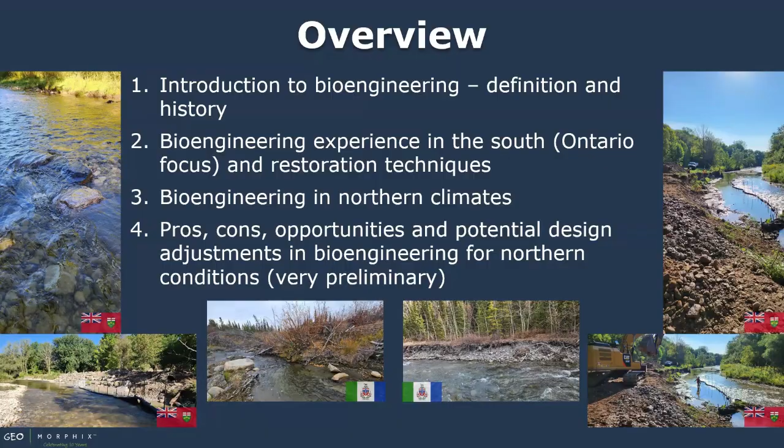Bioengineering is a tried and true method. What I mean by that is the use of vegetation and inert materials like rock and wood have been used for a long time for stabilizing. Bioengineering is actually a very effective method of erosion control.

In a lot of cases, riprap or large rock is used. It's placed on the banks, and we hydraulically size it and put a factor of safety on that. What we're hoping with that is that that rock will not be lifted, scoured by ice, taken by hydraulic characteristics, but the entire strength of the riprap comes from the mass of the rock.

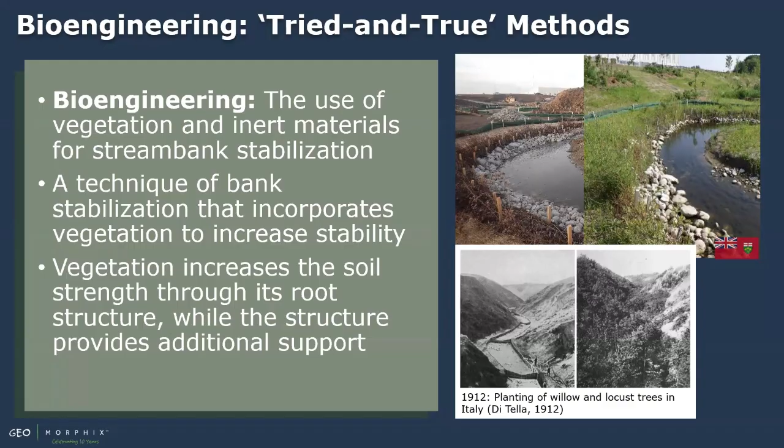Once you introduce vegetation in, growing material, it can bind, producing almost what you would find like a metal gabion basket, but it's a living structure that binds into the banks and actually provides more strength in the long run than the stone or the wood would provide by itself. It's also about soil development and that creation of soil and that binding mechanism to create more of a structure versus an individual particle.

So it's been around a long time. First records of it are 2000 BC in China. In 100 BC, there are records of fascines or wattles being used in Europe. 28 BC, there were willow bundles drawn onto tapestries, which I guess was the first detail.

That's a good engineering joke.

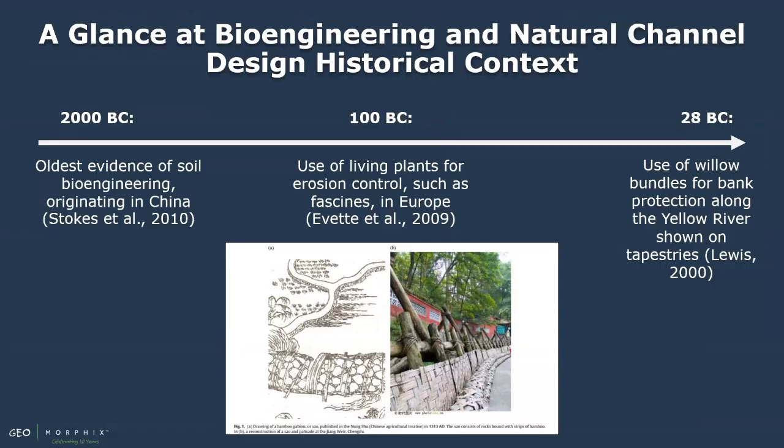Anyways, when we move into the 1600s and we look at a more Eurocentric view, there's an increased prevalence of the use of vegetation for erosion control, for riverbanks, for basically channelization, bank stabilization, and a lot of gully control. The drawing that you're seeing at the bottom is from the 1730s. It's one of the first guidance documents on applying bioengineering, and in this case, wattle treatments in Europe for erosion control. It is not the new kid on the block.

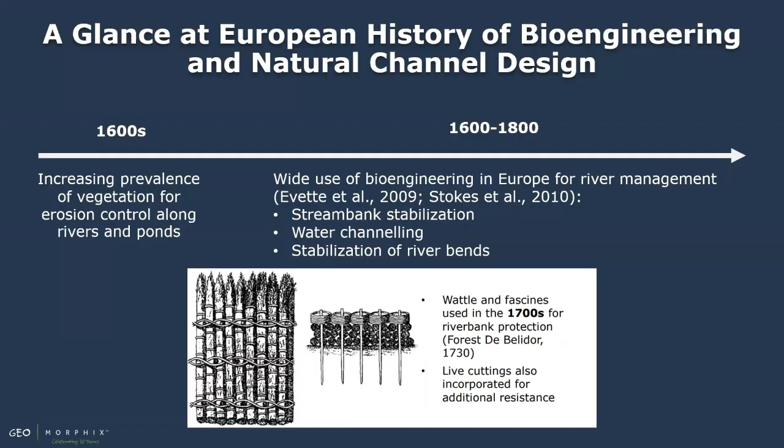Anyways, now we look at the more recent history. So why do people think that bioengineering is a new concept? And the reason is that after the 1940s, we had access to a lot of labor, fossil fuels, and concrete. And in a lot of urban centers, cement and engineered solutions were applied to basically address erosion concerns and to get the water off the landscape quickly.

It was very effective for moving water. It did have other unanticipated impacts, erosion downstream, impacts to aquatic ecology. There are a number of things that we lost in that trade-off of being able to move the water off the landscape quickly. Come to the 90s, we start seeing in a lot of urban centers across Canada, particularly in the Ontario context, that we needed a new approach if we wanted to maintain the ecology and provide other functions other than moving water off the landscape. So we have this resurgence of bioengineering in the 1990s.

I was lucky. My career in consulting started in the late 90s, which means I was able to be involved with this process of trying to build new concepts and bring them into our way of managing rivers. 1990s, the emergence of natural channel design, the idea of taking geomorphological forms that we find on the landscape and replicating them in the design.

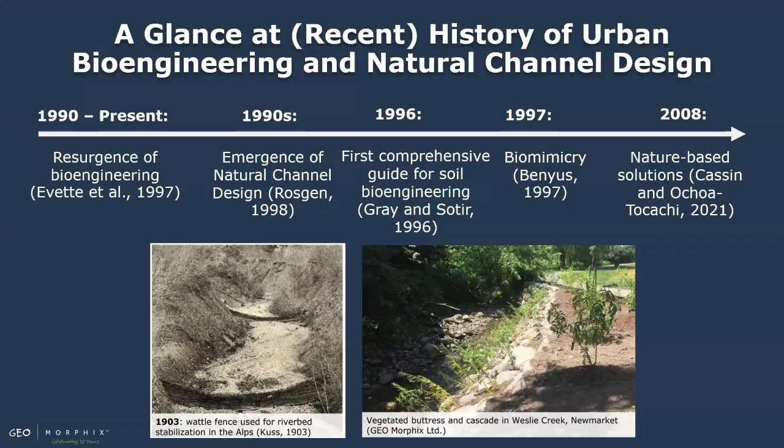What I'd love to see, and I've been able to watch this process occur in Ontario and other jurisdictions, is bioengineering does not remain a unique tool that's only used for habitat restoration, but it becomes a larger portion of the toolbox that engineers, biologists, geomorphologists use to deal with river management. And recognizing that it can be used as part of that overall toolbox for both doing erosion protection and also for providing the ecological benefits.

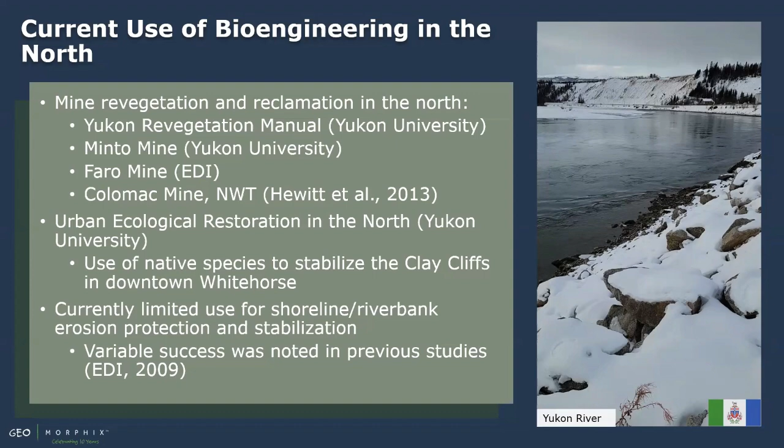Why bioengineering in the Yukon? First, it can be used for a whole bunch of different situations. Shoreline protection, riverbank stabilization, so real true erosion protection, stream diversions at mine sites, tailing pond stabilization, support for bioremediation at contaminated sites. There should be an asterisk there. There's a lot of management and other things that have to go on with regards to that. It's not simply about planting vegetation.

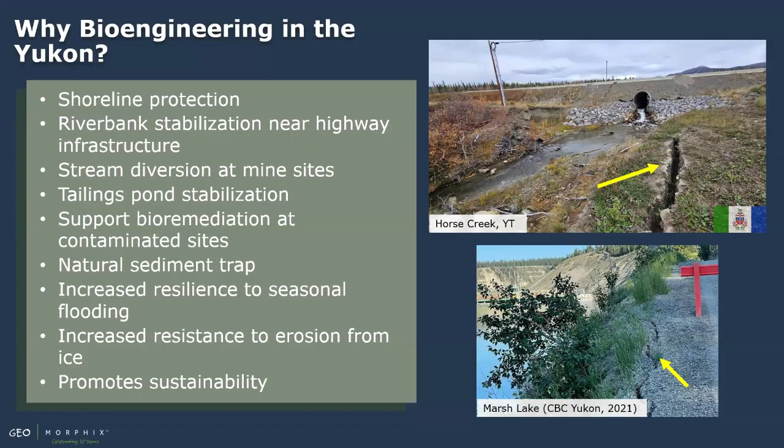Natural sediment traps, increased resilience to seasonal flooding, increased resistance to erosion from ice. And that's an important topic for the Yukon in that ice is a dominant process in your rivers. It doesn't mean it's not occurring in other locations, and I'll give examples, but it is a dominant process and it will need to be better understood how it interacts with bioengineering. And promoting overall sustainability.

Bioengineering is green, but not soft. I actually heard a question this morning that I've heard many times in other jurisdictions, an engineer asking if there were specs, hydraulic sizing, because at the end of the day, when something is put on a drawing, you have to be sure that it works. I can comfortably argue that bioengineering provides erosion protection. You can hydraulically size materials, you can use large wood, the vegetation simply provides additional benefit.

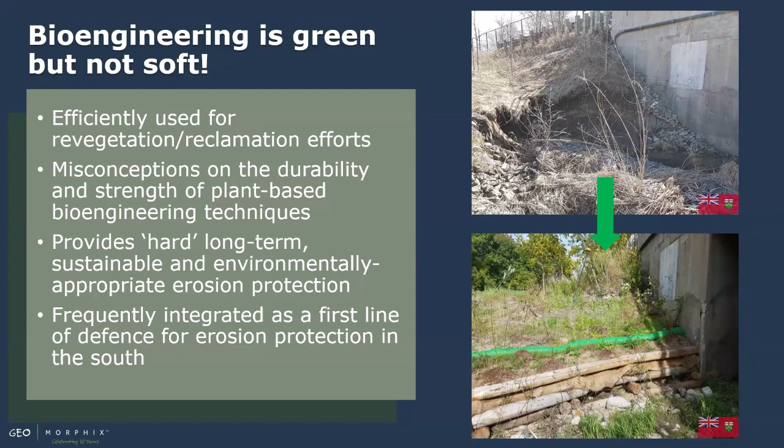Beyond the protection against erosion, what other benefits does it provide? Well, shading, it reduces warming, which is a concern in a number of the provinces, increased carbon storage. I'm currently working through GEO Morphix, which has been around for 10 years, on about 90 kilometers of river restoration design. And in the last 10 years, 30 kilometers of that has been installed. And these are small streams, but very large floodplains.

The carbon sequestering associated with that work, particularly in greenfields, is substantive. Not that that would be a reason for doing it in the Yukon, but to recognize in other jurisdictions, it's an important component with dealing with climate change is an important fact to know.

Increased large organic material inputs, increased habitat and biodiversity, improved water quality, and enhanced ground permeability, infiltration, and groundwater exchange. The reason I put that one up is that often when we put in engineered structures, a concrete retaining wall, armor stone, or some treatment like that, we actually stop that interaction on the groundwater between the channel and the floodplain. While with bioengineering, because there's soil involved and it's more porous treatment, that hydrologic connection can continue.

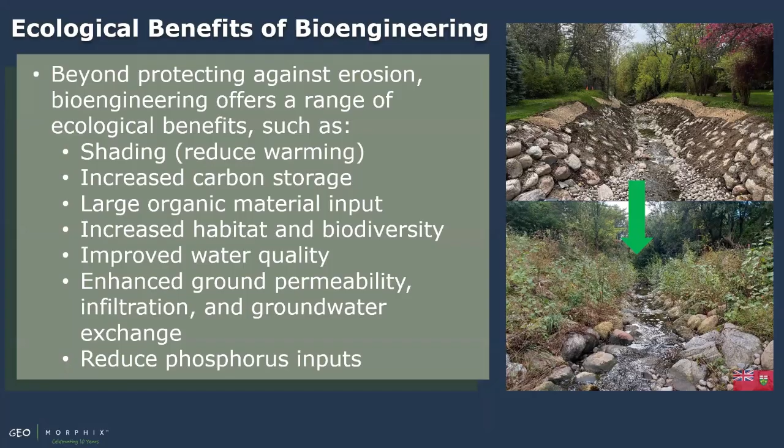Also, reduced phosphorus inputs. Again, may not be a concern in the Yukon, but in a number of the jurisdictions I work in, we have eutrophication in wetlands. We have the Great Lakes where both nitrogen and phosphorus inputs are problematic. Having a method for minimizing those inputs or offsetting is quite important.

I don't completely agree with this chart before I show it to you. It was done by Coppin and Richards in the 1990s, and it basically talks about the relationship between bioengineering and more engineered structures and the whole period in which we design, install, monitor, and then have to replace and go through that process.

Along here, the solid line is basically a traditional engineered approach, a wall. You investigate and design, you do the construction, and then basically there's a period of monitoring, and then walls don't tend to fail gracefully. So what happens is at some point the wall is compromised and you have to go through the whole design reinstall process.

And what I mean by that is they settle, they adjust, vegetation will be removed, but new vegetation occupies those spaces where the vegetation's been removed, so it actually takes less inputs to basically maintain that infrastructure versus a hardened engineered feature. So over the long run, you may get cost savings. I say may get cost savings.

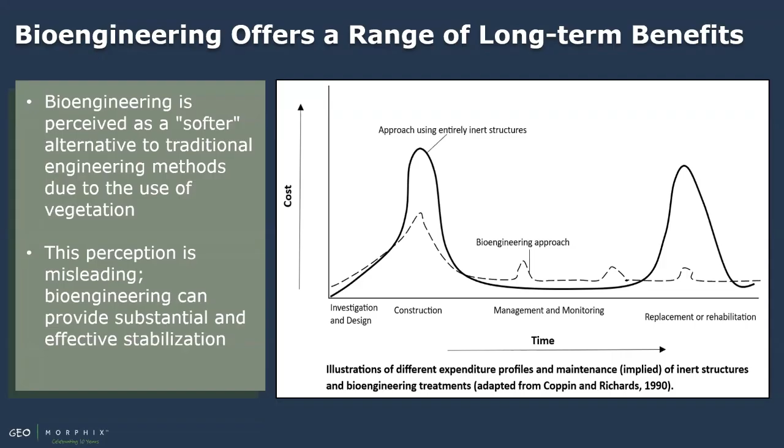So there'd be some discussion of, well, why would you then want to do this over an engineered approach if the costs are going to be similar? Because of all the other environmental benefits you gain from using bioengineering over some of the more traditional gabion baskets, armor stone, or concrete walls.

This is to show you that in a number of provinces, we have very similar conditions to the Yukon. I have used the territorial flag and the provincial flag just to point out where the photos are from, but I'm figuring from this landscape, you all could have guessed.

Same issues, undercutting of the roots, scour, ice scour, major events, basically creating erosion, and even in some cases, some geotechnical failures. The processes are the same. The morphologies in many cases are similar. It's just the magnitude of the different processes, ice, hydraulics, growing season, that's what actually varies.

I will also point out that Horse Creek is much prettier than this creek from Mississauga. I don't think you guys realize, as a geomorphologist, the ability to give a talk right next to the Yukon River is, in many cases, a dream come true.

Anyways, one of the things about bioengineering is it creates a resilient structure by creating roots and putting wood mass in front of the structure. Even if damaged or removed, the vegetation can often reestablish itself and it will self-heal. Even when compromised, structures fail gradually rather than catastrophically. That's that fail gracefully term.

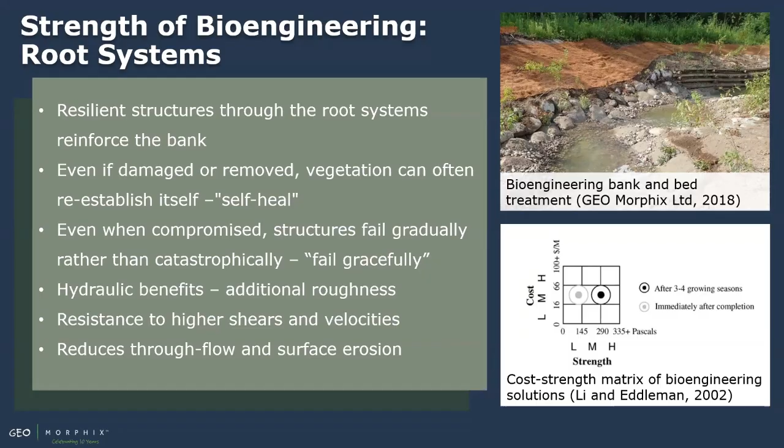This is a treatment on Lake Ontario in Oakville. We can see the rock structures in front buried pretty deep. Then a new beach is installed in front of it, and plant material is being installed at the top and along a number of the lifts where it's exposed to wave attack.

The initial strength comes from the weight of the material. It's basically the mass of the material. Later on, once the roots establish and tie into the native material or parent material, it provides additional strength. For those people working in wave environments, you also know that there's pressure differentials that tend to suck material out. In a lot of cases, filter cloth would be applied to the back to reduce that kind of suction effect. But once you have vegetation in place, it basically creates a filter that stops the fines from being moved and migrated through.

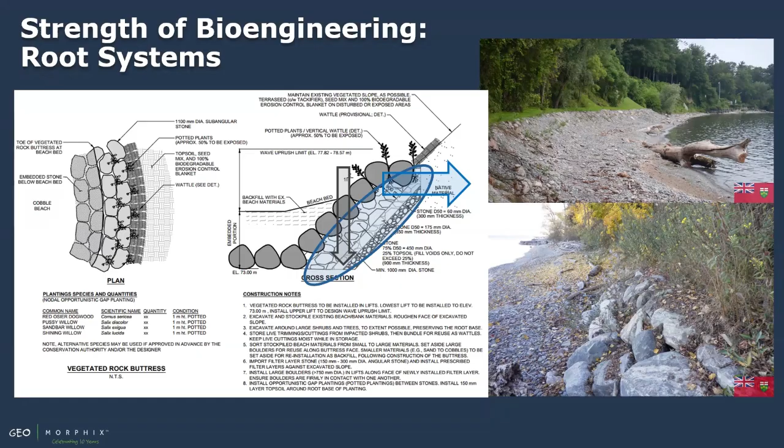If we look at a bank treatment in a river, we have the exact same system. We have the mass of the material initially, then basically we have the roots tying into the banks. And I know for many who don't work with plant materials, there's this concept that it really can't be adding that much strength.

If you have a properly bioengineered bank treatment, the velocities to scour it can be in excess of 3 meters per second. Okay? Even grasses can take sustained velocities of about 1.5 meters per second. So the vegetation does provide a substantial benefit for the overall strength of the treatment. Then again, how quickly does it grow? How well does it establish? Will you get that same effect if you try to apply it in the north?

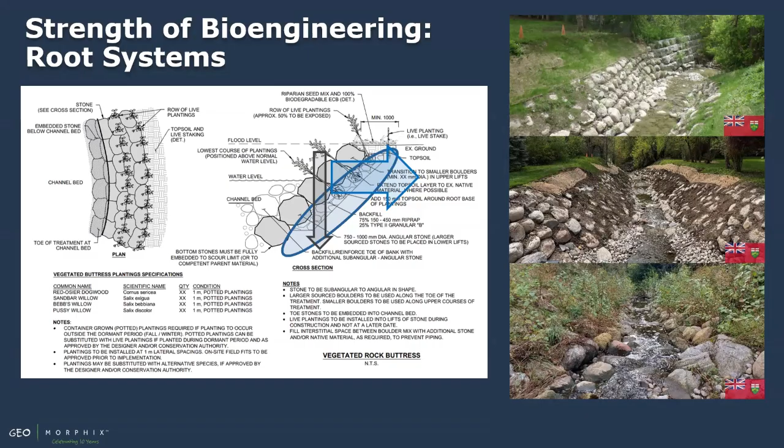So this is one treatment. I usually don't design this way. You can see a very narrow channel here. It's in an urban center. It's in the middle of a cemetery. The channel cannot migrate for obvious reasons.

We usually would have involved some level of natural channel design too. And what I mean by that, we would have provided some sinuosity. We would have provided some terracing, some other ways of dealing with the hydraulic energy. But in this case, we can't simply because of the constraints. This was constructed in 2022. It's in an area of Richmond Hill, which is outside of the Greater Toronto area, a little bit north.

When we installed it, this was not bare root material. It was live stakes. It was a piece of wood with no roots. When I went back 2.5 years later, 35 centimeters of root production. What's interesting is there was only 15 centimeters of soil. So it's already tying into the materials behind it. Will that same process occur in the north? Something to be studied or looked at.

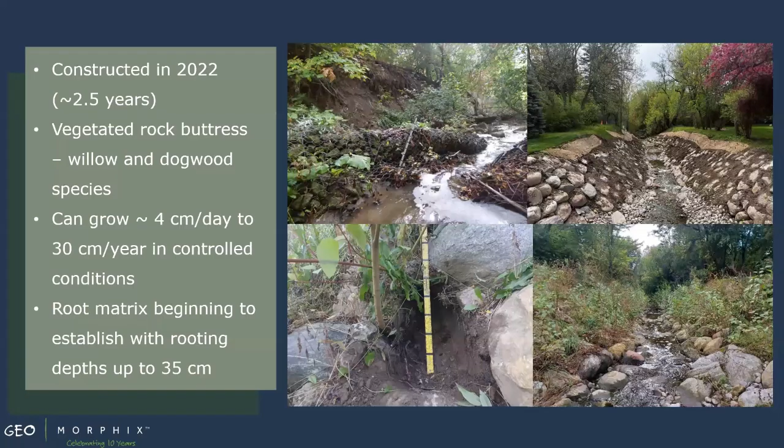So bioengineering can take on a range of types. There are hundreds of details for bioengineering, and there's all the way from soft treatments that are used in low energy environments to more substantive treatments that include wood, rocks, erosion control mat, compost, and even in some cases, soil enhancements to improve the growth rate.

But the most simplified one is basically taking a stake 1 meter long, cutting it off during dormant season, which in the Yukon is more extensive than other places, so you have a longer period to collect the materials, and then basically hammering it into the ground and allowing it to grow. Put a reasonably high density of them, and it will actually provide a substantial amount of protection.

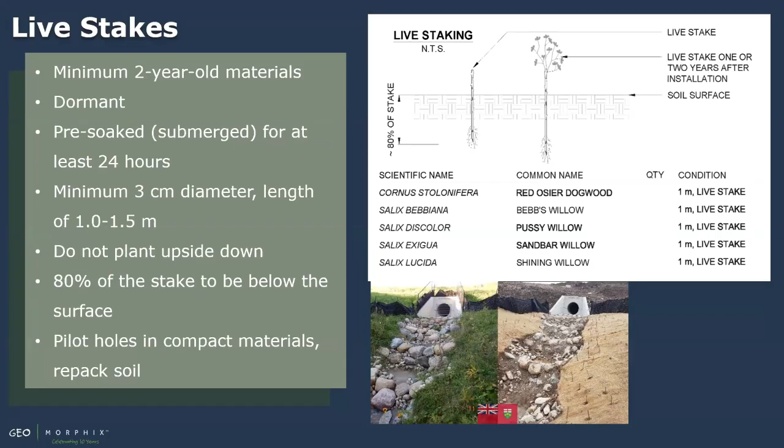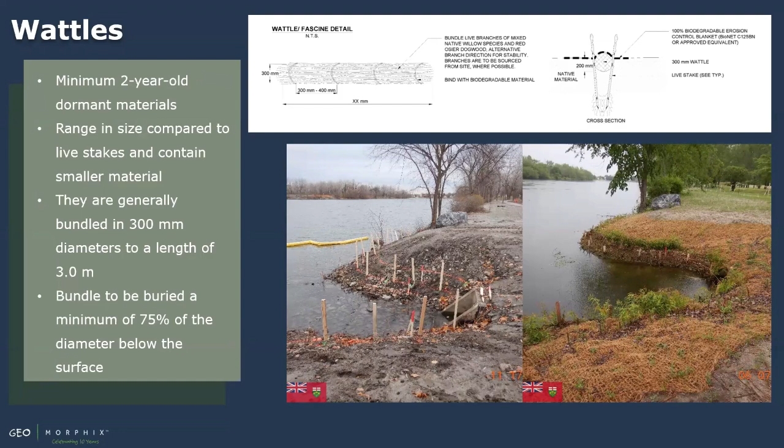Brush mattressing. Brush mattressing is basically building a bed. You lay out a brushing, you bury it, dormant materials again, kind of like the live stakes, lay it out, then tie it down with erosion control mat or with some level of biodegradable twine. Bury that in soil, seed it over. Maybe, if you know that you have additional pressures, put in a little bit of toe stone and then allow it to grow. In this project, that growth difference is 1 year. That was installation, come back next summer, and this is what we're looking at with regards to the growth.

Again, will we get the same effects? Also, do we need to modify it? Do we want ice forming at the foot? Do we want a protective layer of ice? Do we want to keep it ice-free? Do we put in a series of boulders in front at different spacings to change the hydraulics? Because we know where frazil ice develops, where anchor ice develops. Understanding what needs to be done with regards to the rock placement is something that still probably needs to be studied. We understand flow around vegetation.

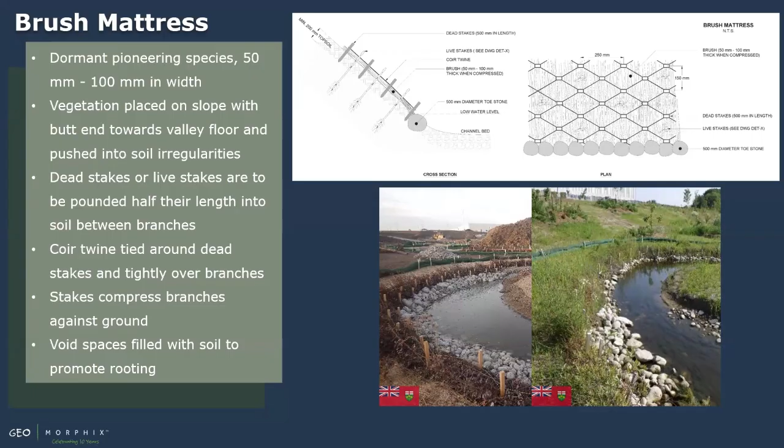We understand flow under ice. Actually, Corinne Smith worked on her master's on the hydraulics of flowing water under ice. Interestingly, she is from Whitehorse. She did that research in Ontario, and then came back home because I think she missed the winters. So we understand those, but we don't know the interaction between them. There hasn't been a lot of work done on the effect of vegetation and ice at the same time.

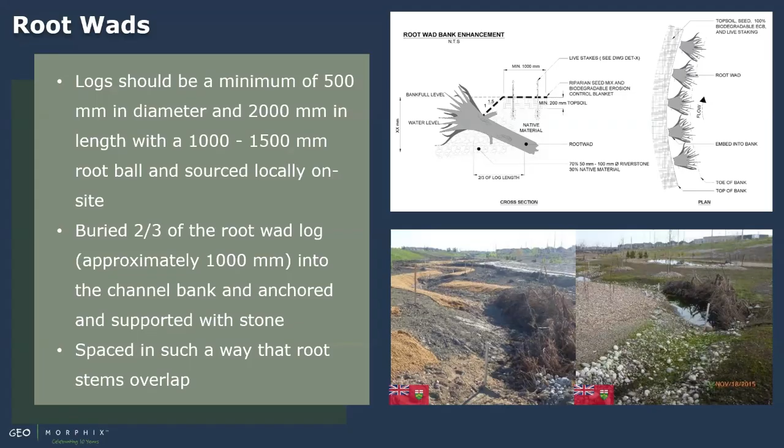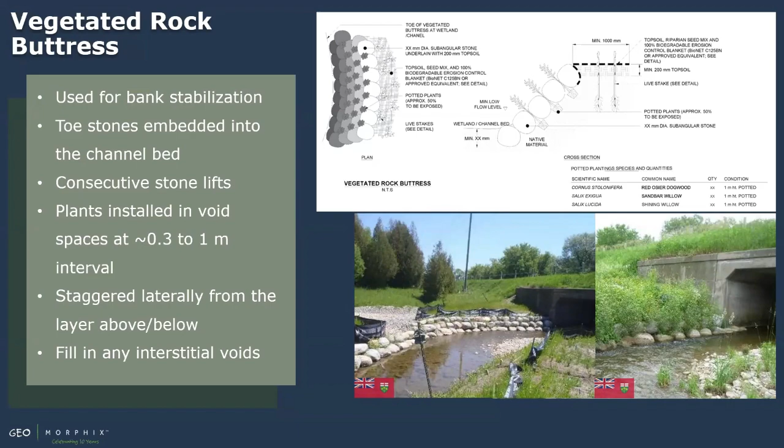Vegetated rock buttresses. Again, these materials are hydraulically sized. The vegetation is put in layering. This is what we're using in a lot of cases for erosion protection of infrastructure. It is a hard but green approach to bioengineering, and it provides benefits. But again, do we have to change the stone arrangements? How do we want the ice to interact with the rock and the vegetation treatment?

There's an apology to the ecologists in the crowd. I've grabbed a couple of random species that are here. The palette may be smaller for bioengineering, but it is here. There's willow species, they're cold tolerant, they have rapid rooting, and regenerate following ice damage. There's alders, suited for nutrient poor soils, established on sandy banks, rapid growth, and dogwoods. So all the materials that are required for the bioengineering are native and grow here.

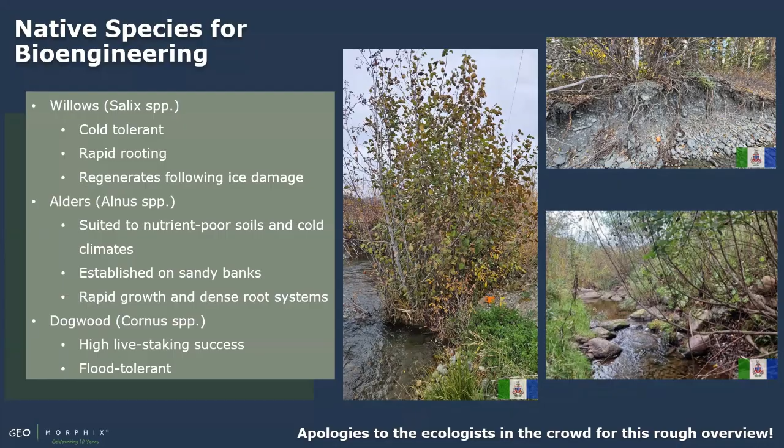Slightly different. It is colder here, but I will point out that Timmins is quite north, and it has a similar growing season, similar climatic condition, and we've done work there doing bioengineering, and in Brandon, Manitoba. I've done work there previously. It was installed and then immediately hit with a 400-year event. I am proud to say it was still there afterwards.

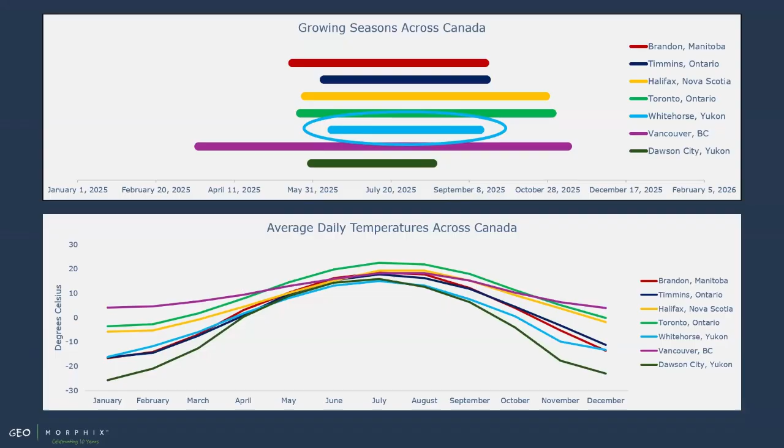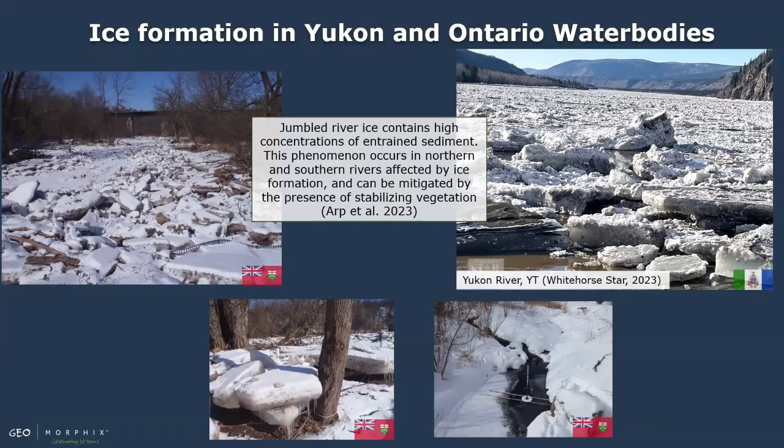I wanted to just point out that we are working with some of the same processes, just at a different level. Similar geomorphological processes: undercutting, expansion scour at culverts. We undersize our culverts too. Slumping, ice and hydraulic scour, just different measures of it. Freeze thaw, freshet and storm-driven hydrology, like atmospheric rivers coming through, which now impact some parts of Yukon and northern BC and bring a new peak from rain that isn't just related to the snowmelt.

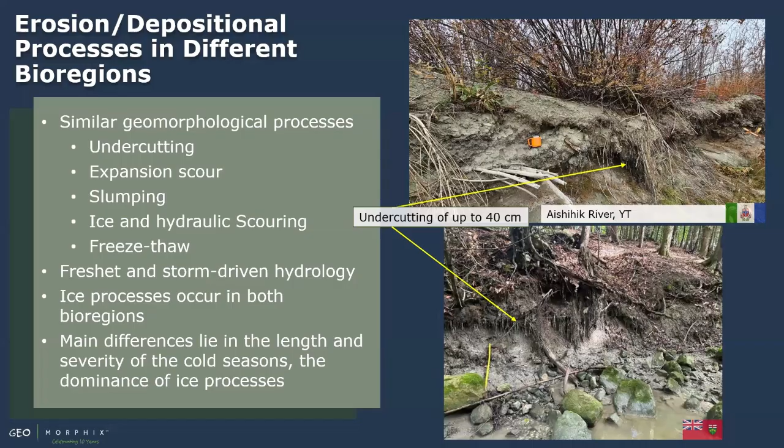Ice occurs in both regions. The main difference lies in the length and the severity of the cold season and the dominance of ice processes in this jurisdiction. We have the same erosion problems. This is from one of the Yukon rivers, and this is the approximate rooting depth. All the scour and erosion is occurring here. So all the energy is being exerted on an area where the material can be eroded at probably between 0.5 meters per second and about 1 meter per second.

If you were to lower that bank and include willow treatments, you could increase that to almost 3 meters per second, that it'll be able to resist erosion. In which case you're able to deal with this erosion in this area in a very similar way that it would have been done in Ontario.

How do I know that? This is the Pine River. You can see me standing by this bank. That's the rooting depth. Put in root wads, terrace. That's what that blue line indicates, is a terrace to allow the water to get over, but more importantly, to allow the rooting depth to get to a point where it's protecting the bank.

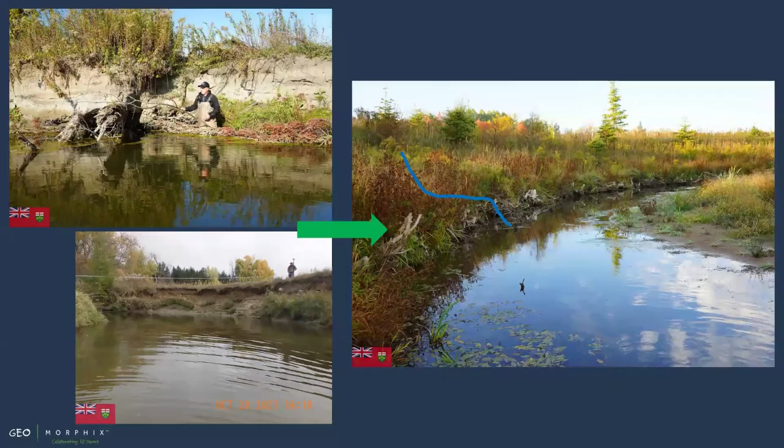I put this in because we do the same thing with our culverts. We have the same erosion issues, as you can see with the protection up here, but again, your rivers are prettier.

Pros of bioengineering in the north: the use of abundant local materials. We have a lot of nurseries supplying bioengineering materials. You have many point bars with a lot of alder and willows on them. Flexible and adaptable designs. Low disturbance installment, which means that you can do this maybe with hand labor. There may be more benefits in the Yukon than in a number of the provinces. You have farther distances to go. If you don't have to take materials with you, or you can source some of the materials locally, it's probably a benefit.

Ecological and cultural values, climate adaptation, alignment with Yukon's guidance, and in many cases, permitting with the Department of Fisheries and Oceans, and mitigation of ice-driven erosion. I think this is one of those areas that we really need to do some research on, is to look at that interaction between ice and bioengineering.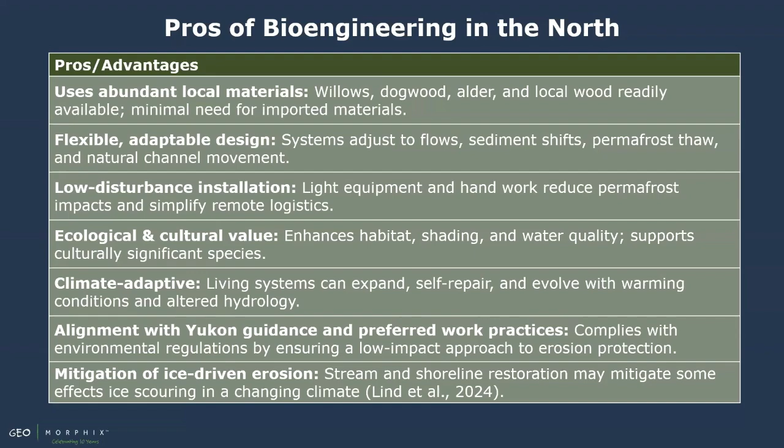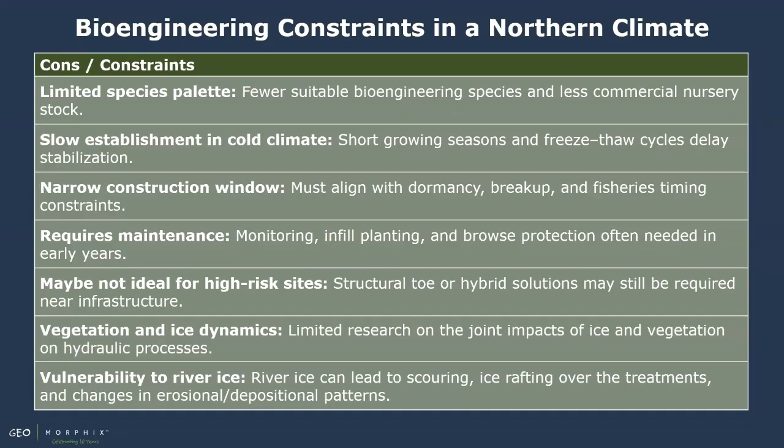Vegetation and ice dynamics, I keep coming back to that, and vulnerability to river ice. Those are things that need to be examined, but there are areas with ice processes where bioengineering is working, and it's working effectively. Potential design adjustments, ideas and concepts: ice management and protection, extended monitoring periods. We usually go 2 to 3 years, maybe 5. Maybe you're going out to 10, maybe it's shorter, but it all depends on the growing cycle.

Enhanced toe protection and rock armoring. Larger factors of safety. Do you need a larger factor of safety because of ice rafting or ice scour? I'm not quite sure about the answer to that, but I know from our own jurisdiction, we use about a 1.5 factor of safety on the sizing, and it appears to work. Strategic vegetation placement, flexible vegetation, using things that will actually bend with ice. Bend, maybe break, but not actually take out the treatment with it.

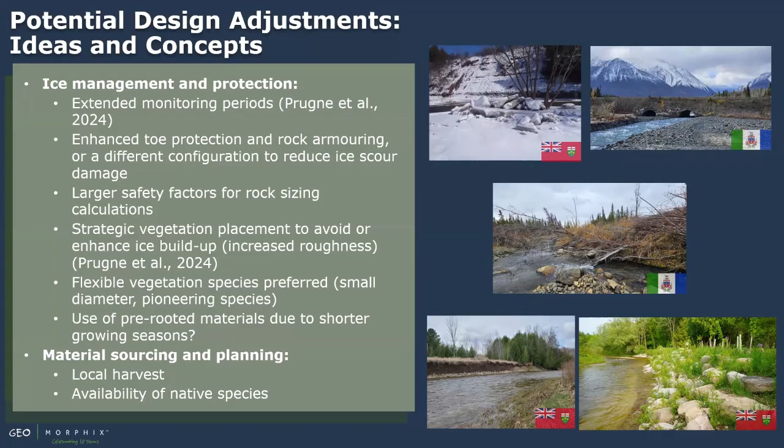Use of pre-rooted materials. Maybe you're going to have nurseries where there's stocked materials there. Material sourcing. I think this is going to be a big one because of the distances that have to be traveled to do the work. You likely want to find locally sourced materials, or know that you have local providers that are going to be able to get the materials there, and just the availability of the native species.

So my conclusions: bioengineering is successful and widely used as a form of erosion control in many regions across Canada, and it is being applied in the Yukon. It offers a flexible and resilient approach to erosion control over pure engineered methods.

There are opportunities for ongoing research to optimize techniques for the unique climate conditions and processes. That's my selling pitch. I would love to do research up here with regards to bioengineering, and I think there's a lot of opportunities. There's likely design adjustments that are going to be required.

The same, but different. You can't simply take the detail, take the spec. You have to consider the processes that are dominant in your environment. And there is an opportunity to move from unique application, not just using it for habitat restoration, but actually applying it more widespread, using it as part of the overall toolbox for erosion control.

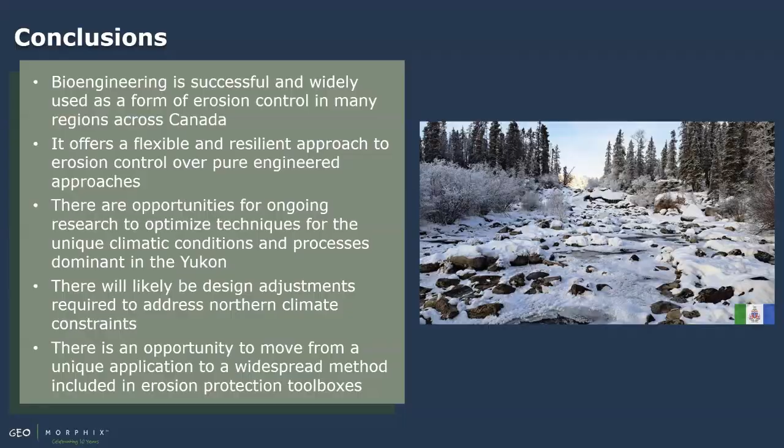With that, I want to make one request. I love the history of bioengineering. If there are any members of the First Nation community that know of areas where bioengineering may have been applied pre-European settlement, I would love to hear those stories that people are willing to share, because I try to collect records of where people have done bioengineering, because I know it's been used over and over again as a solution for erosion control and for many other reasons.

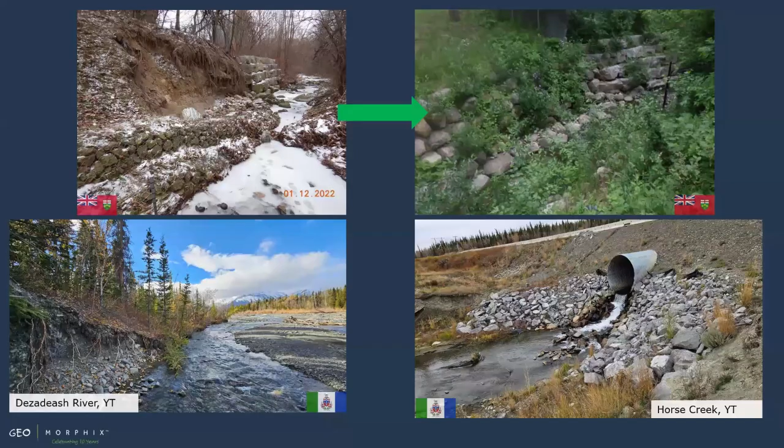In the Yukon here, we have all these bends and flows in the rivers, and we see a lot of this erosion. I tend to think it's the actual ground that's underneath it. I would assume there's more soil on that last 30 feet and the front is gravel based, also considering the height elevation. But one of our biggest erosion factors, other than maybe ice on the river, is wildfires, just burning down a whole landscape. And how deep does that fire burn into the root system?